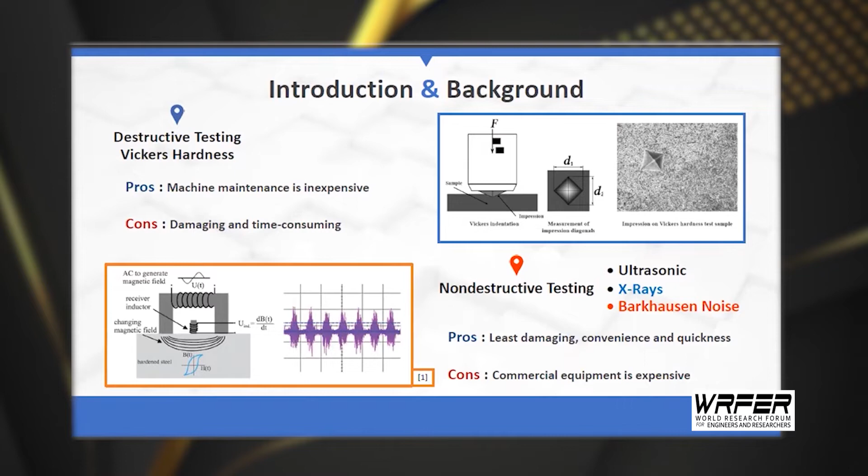So magnetic field lines make a closed loop and run from north to south outside the magnet. Random domains have no net magnetic field. When many of the domains line up, you get a net magnetic field. The Barkhausen noise is based on the discontinuous movement of the magnetic domain walls in ferromagnetic materials due to being stimulated by changing external electromagnetic fields, resulting in noise within the material, that is Barkhausen noise.

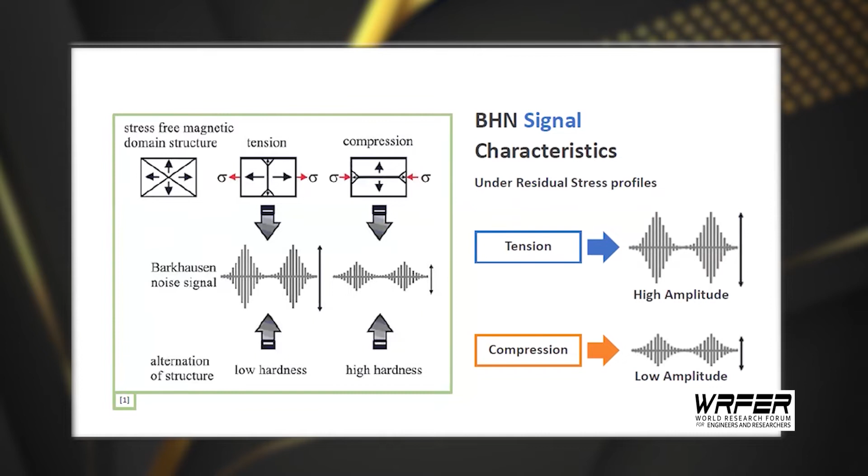The signal features of the BHN signal are influenced by differences of material property in the hardness and external force. So, BHN signal characteristics under external force profiles: the BHN signal received from compression has a smaller amplitude than from tension force. This research aimed to propose a suitable method for measuring the residual stress of AISI 1050 sheet steel with ASTM standard. The BHN system was used to measure and calibrate with the XRD technique, or X-ray diffraction technique. Okay.

Then I focus on the methodology. This is the diagram of the system. I will start with the waveform generator. The waveform generator was used for generating a sine wave signal at a low frequency of about 5 Hz. This waveform was powered using the power amplifier, gaining the current up to 1 amp to stimulate the exciting coil to excite the electromagnetic field into the material. Then the BHN signal caused by magnetization was measured using the pickup coil. The signal amplifier and a low pass filter were used to improve the BHN signal obtained from the probe.

The current and temperature sensors were used to monitor the exciting current and working temperature of the circuit, and also give feedback to the processing unit. Sensing signals were received via a data acquisition, or DAQ, interface with the personal computer. Data and signal processing were performed by LabVIEW programming.

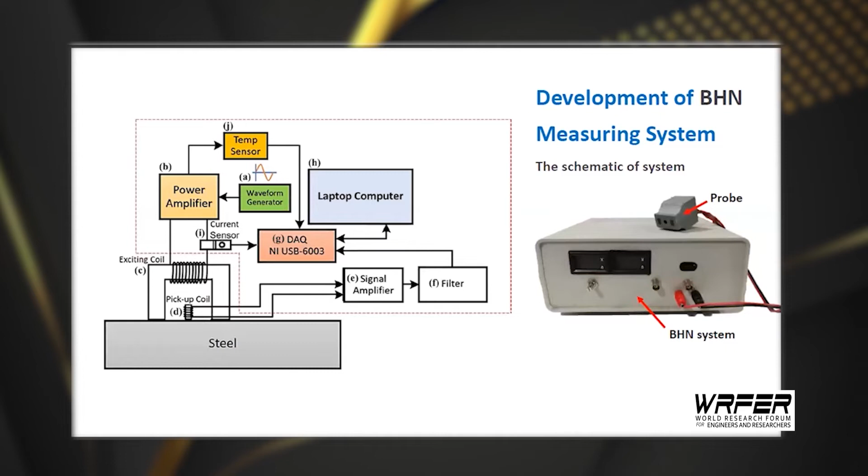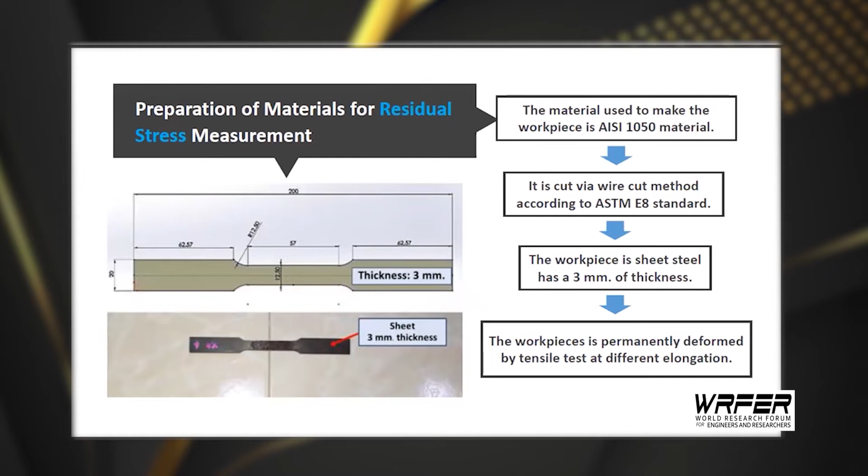So the material used to make the workpiece is AISI 1050 material, cut via wire cut method according to the ASTM E8 standard. The workpiece is sheet steel with a 3 millimeter thickness. The workpiece is permanently deformed by tensile test at different elongations, performing the tensile test beyond the yield point but not exceeding the ultimate point. That is, the tensile test is performed during strain hardening to achieve different levels of residual stress.

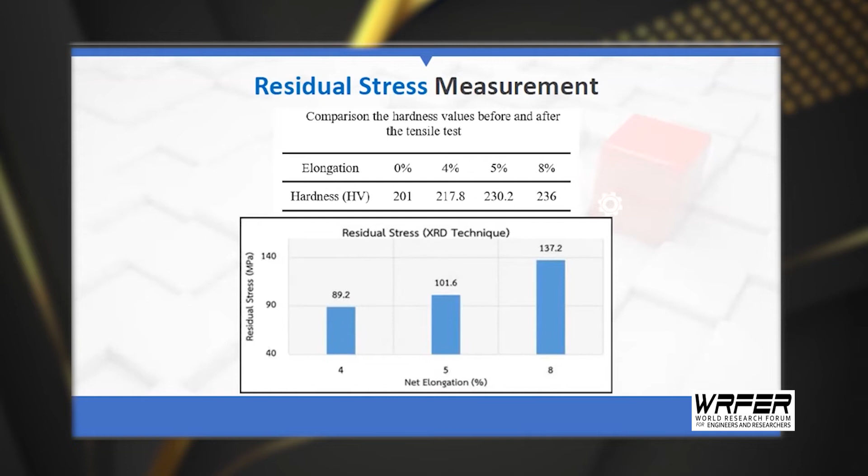Okay, then test by measuring the hardness before pulling and after pulling the workpiece. The range of hardness measurement is in the gauge length obtained from the calculation. The workpiece increases its hardness due to the stress. It also resulted in residual stress, with the sheet workpieces having elongation of 4%, 5%, and 8%. Then the tensile test workpieces are taken to measure residual stress by the XRD technique as a benchmark for calibrating the signal values obtained from the BHN system.

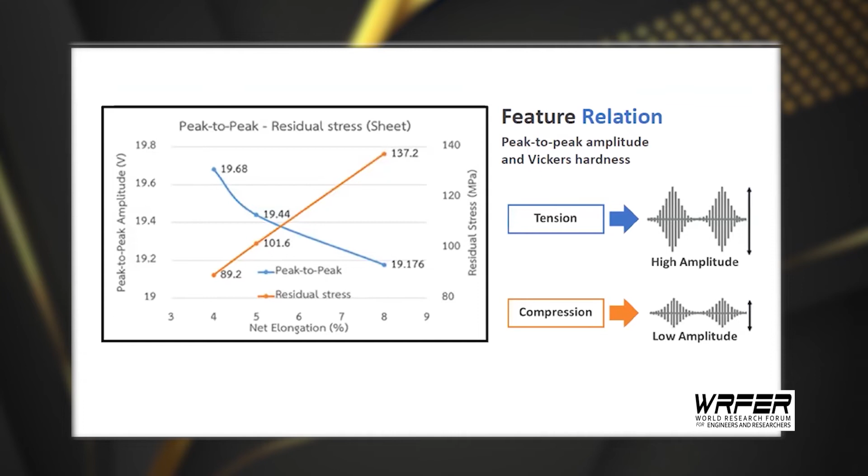Okay, next I focus on the signal processing. At first, the BHN feature and residual stress were varied as previously mentioned in this research. Of particular interest is the result obtained from the peak-to-peak amplitude feature, a measure of the difference between the maximum in the negative peak and positive peak of amplitude. This feature is therefore the most commonly used for correlation. The BHN system performed a series of experiments and concluded that 5 Hz coil excitation frequency and 1 amp coil excitation current would be the best case.

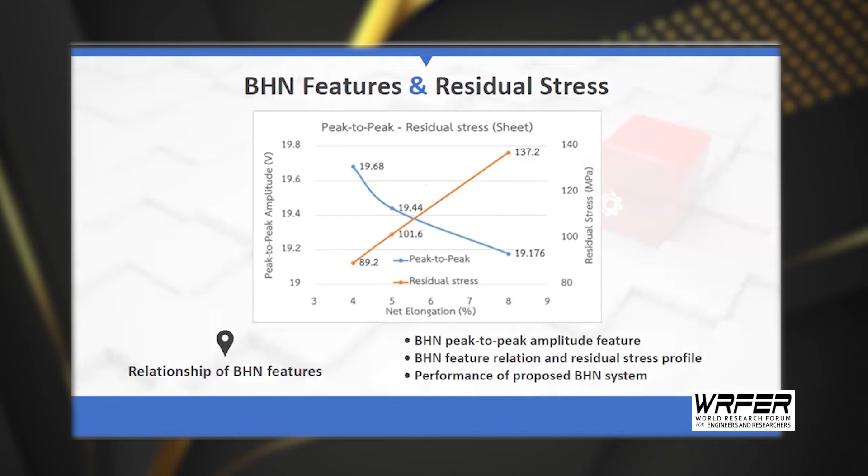Okay. This is due to the measured signal being the most linear trend feature of the graph. Therefore, the regression equation is applied, which has been converted to residual stress for the sheet workpiece. By the distribution of data in the sheet workpiece, 5% elongation is quite a bit more than the others, because the pulling control is quite difficult. Therefore, it affects the measurement accuracy in that range.

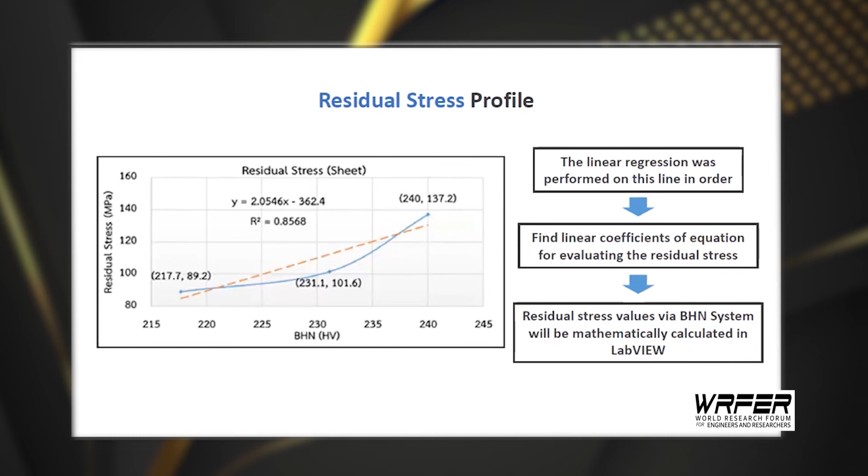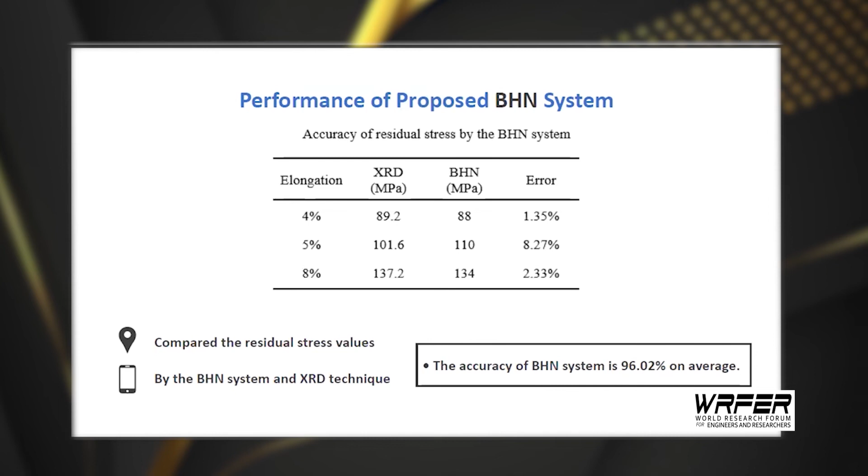After obtaining a prediction equation, the BHN system was used to measure the residual stress again. This is compared with the residual stress obtained by the XRD technique to test the performance of the BHN system. Therefore, the average error in the BHN system is 3.98%. So this system had a measurement accuracy of 96.02% on average. So,

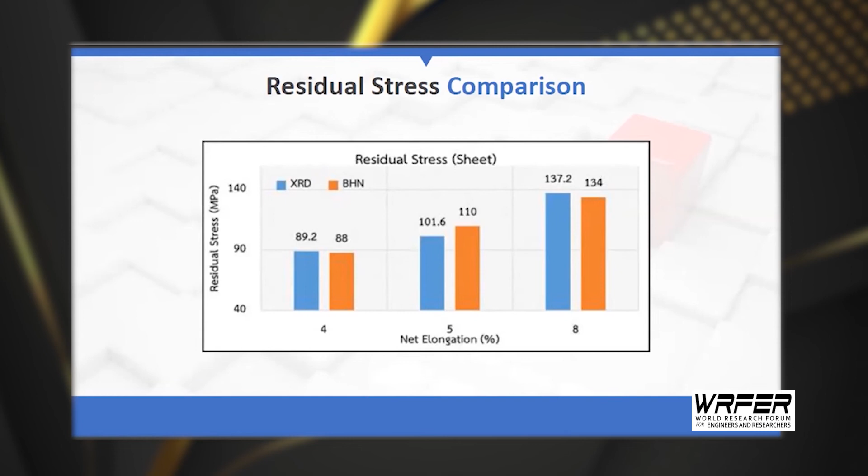The average residual stress values measured by the BHN system were then compared with the residual stress values by the XRD technique. It's noted that the highest error was found in the 5% elongation. This may be due to using the linear multiple calculation, or maybe the pulling control is quite difficult. However, the measurement accuracy of the proposed system is 96.02% on average. Therefore, it can be concluded that a non-destructive residual stress tester based on the BHN technique can be used to measure residual stress accurately.

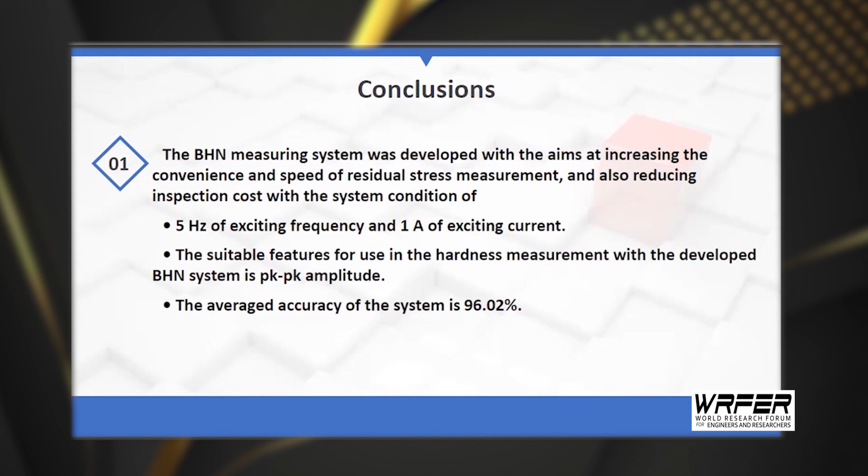To sum up, the BHN system aims to increase the convenience and speed of residual stress measurement, and also reduce inspection costs. The conclusions of this work are as follows: the exciting frequency and the appropriate exciting current used to measure residual stress are 5 Hz and 1 amp. The accuracy of the BHN system is 96.02% on average when measuring residual stress compared to the XRD technique, which is enough for the steel industry to use as an inspection method for quality control.